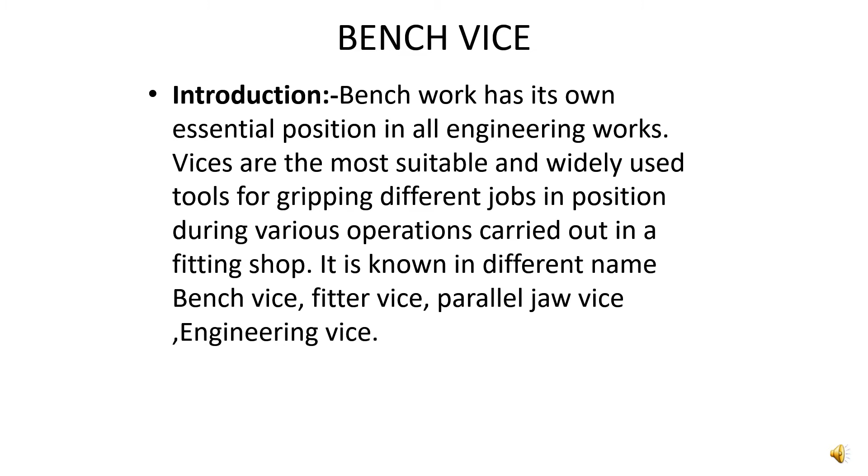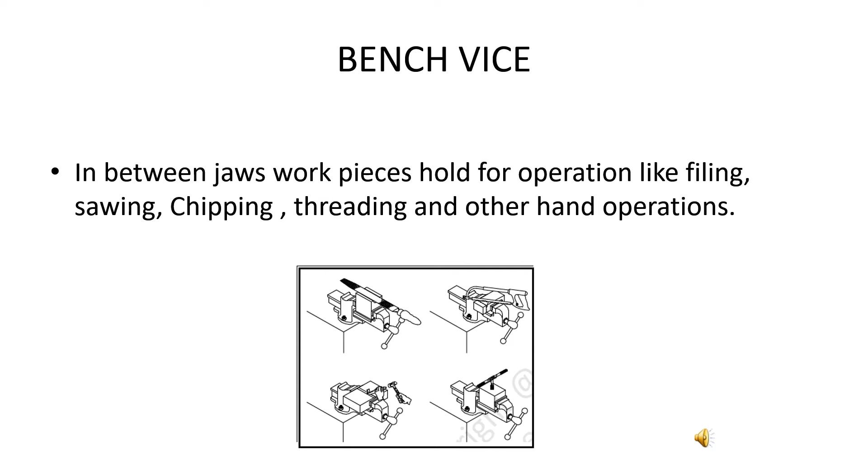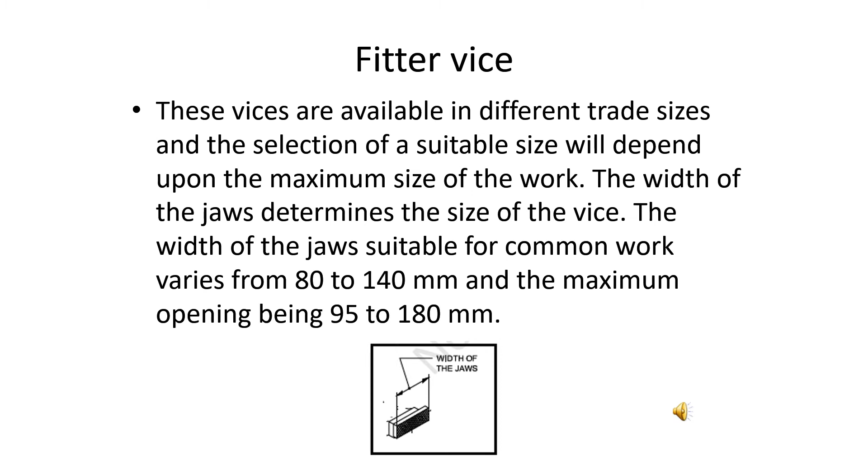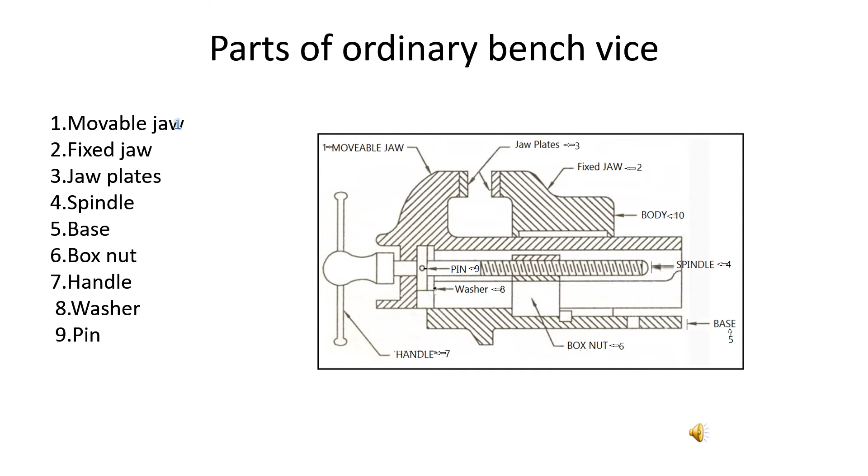Parts of ordinary bench vice: first one is movable jaw, second one is fixed jaw, third one is jaw plate, fourth one is spindle with square thread, fifth one is base, sixth one is box nut, seventh one is handle, eighth one is washer, ninth one is pin, tenth one is body, eleventh one is coil spring.

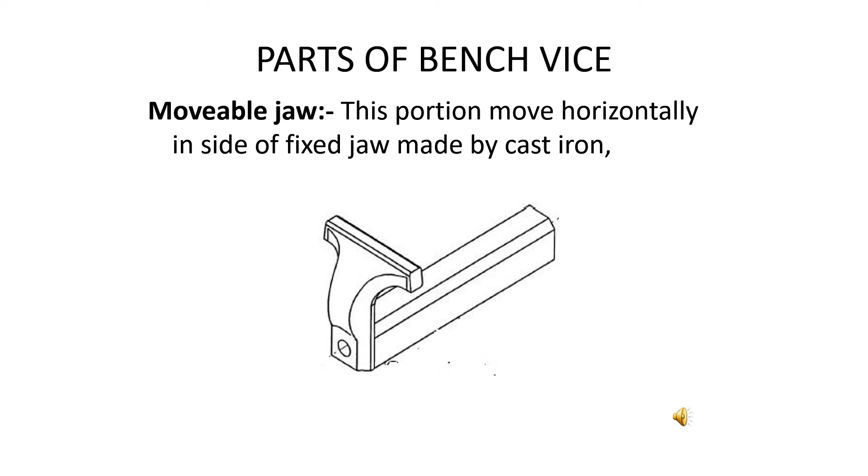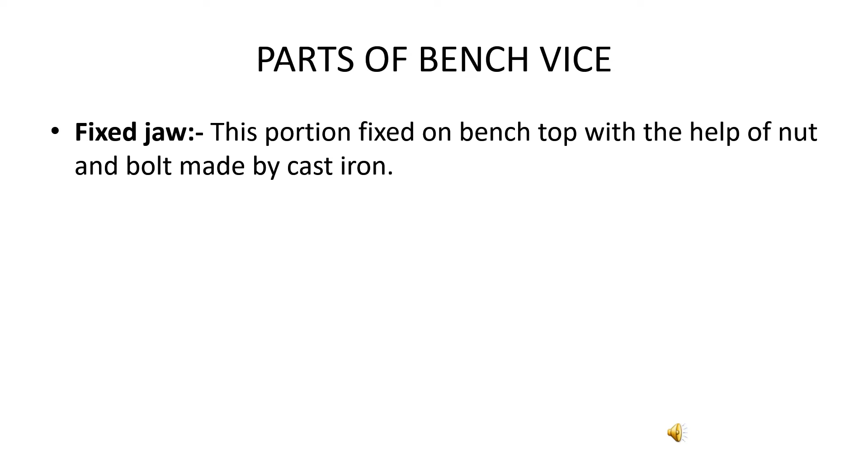Now we will know about individual parts of bench vice. First one is movable jaw. This portion horizontally slides inside of the fixed jaw. It is made of cast iron. Second one is known as fixed jaw. This portion is fixed on the bench top with nut and bolt. It is also made of cast iron.

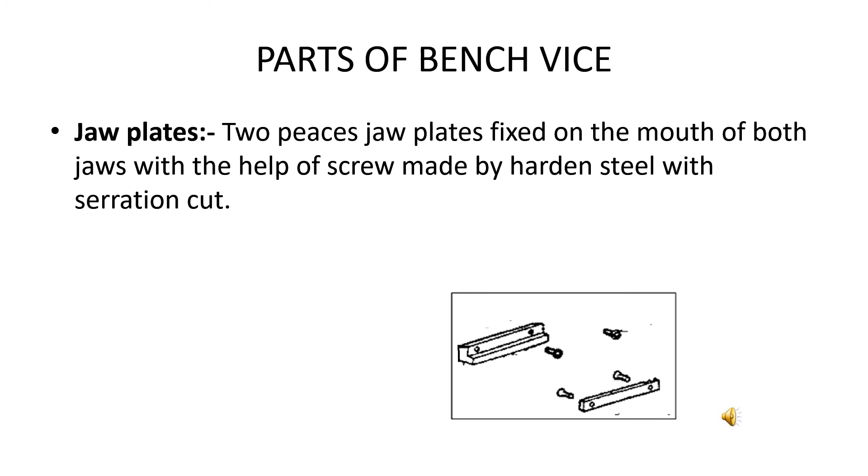Third one is jaw plates. It is available in two pieces. Individually, they are fixed on the mouth of mobile jaw and fixed jaw with the help of screw. It is made of cast steel, hardened and tempered. On the face of those pieces, serration is cut. Serration is the design on a flat surface to prevent slip.

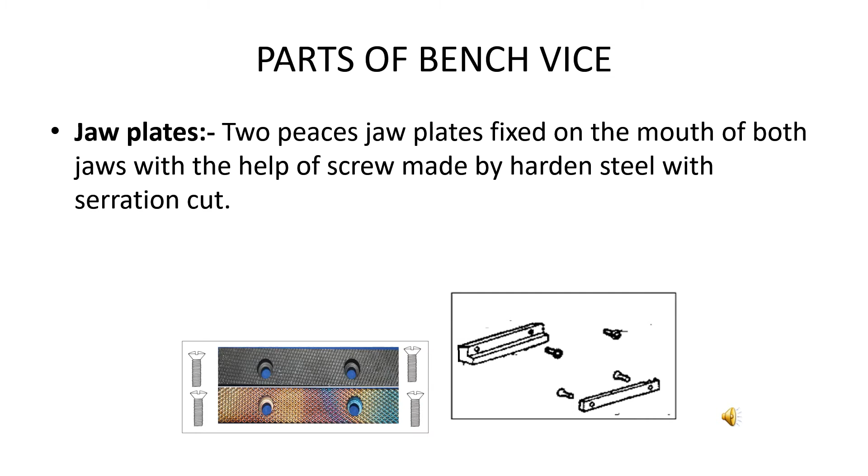Next one is spindle. Generally spindle is fixed with mobile jaw with the help of spring, washer and pin. It is made of mild steel. On the surface of spindle, square thread form or buttress thread form is made for quick release vice. Spindle is connected with box nut to move horizontally inside the fixed jaw.

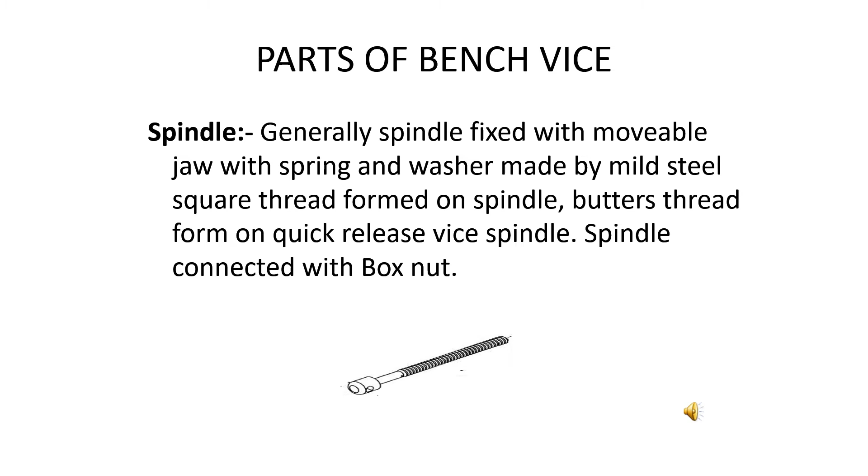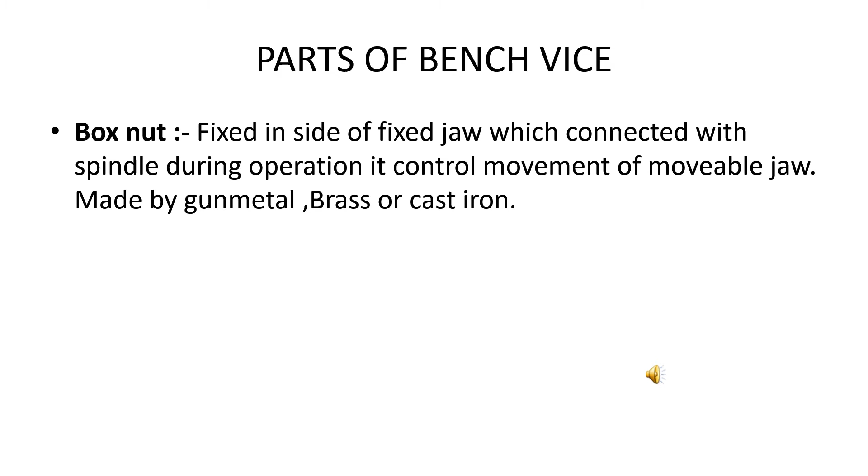Next one is box nut. That box nut is placed inside of the fixed jaw. It is connected with spindle to slide the movable jaw inside of the fixed jaw. It is made of gunmetal, brass or cast iron.

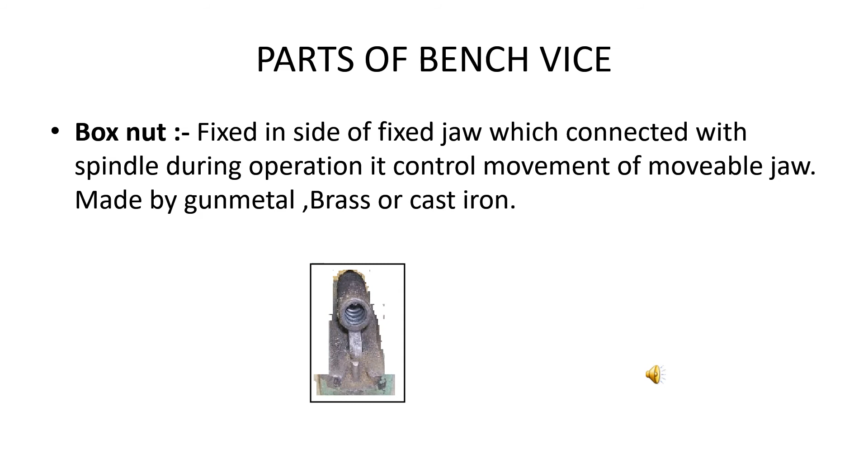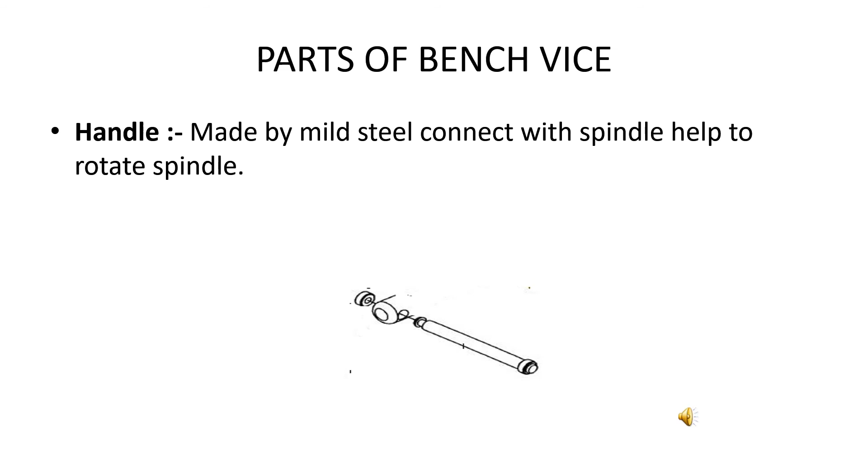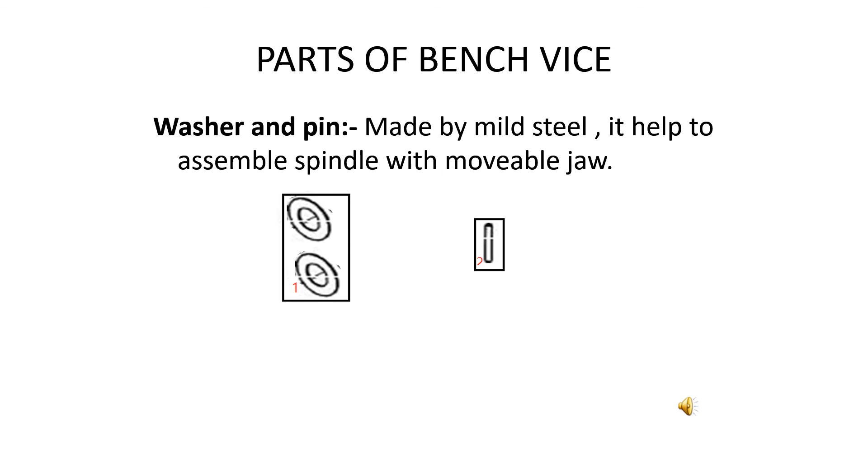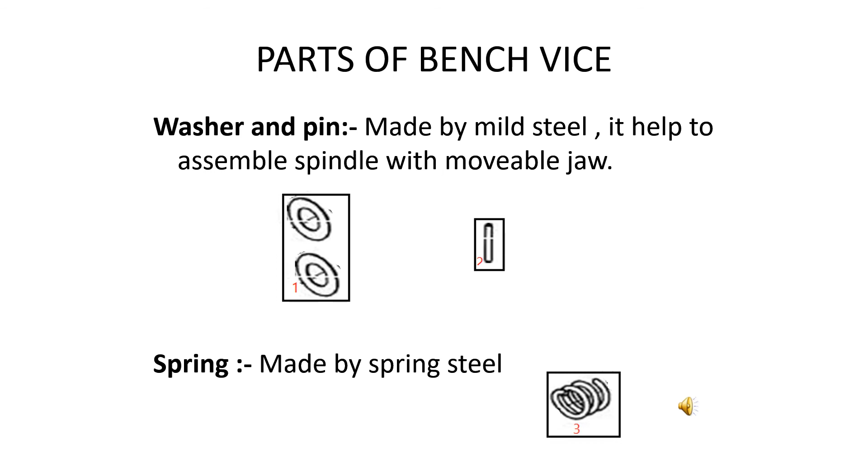Next, handle. It is made of mild steel. It connects with spindle, helps to rotate spindle. Next, a group of parts which help assemble spindle and movable jaw: first one is washer, second one is pin, both made of mild steel. In between washer and pin, one part is fixed known as spring, made of spring steel.

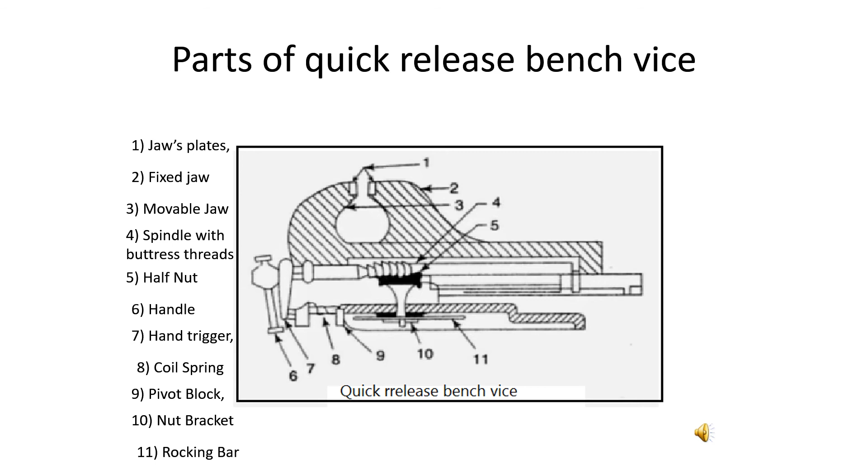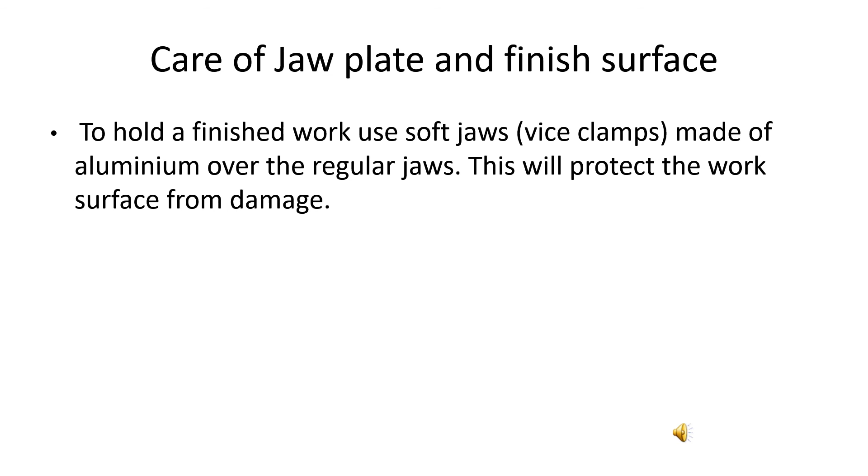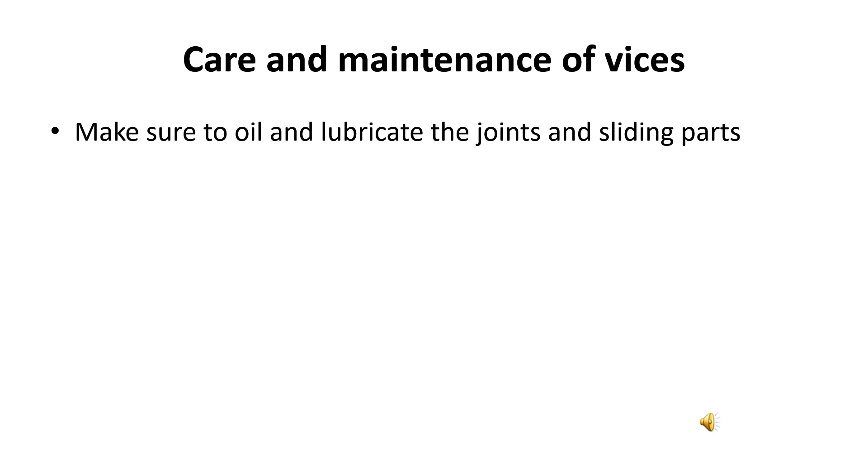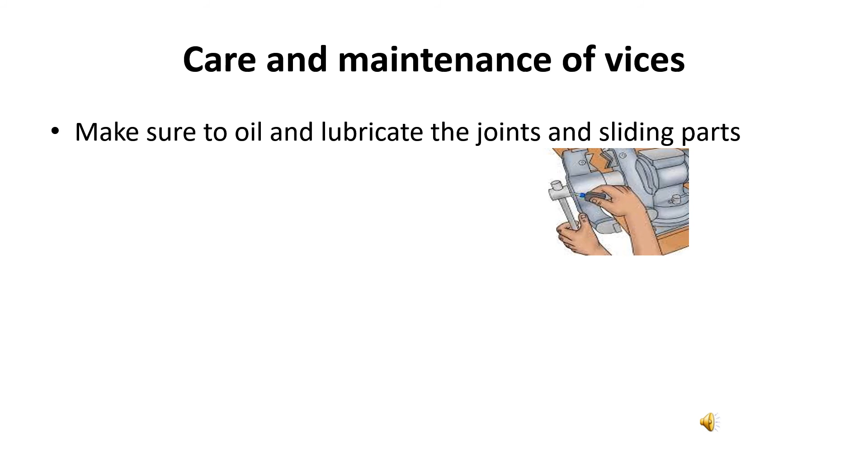If you take care and maintain tools and equipment, the life of the tools and equipment will increase. Also, at the time of work, it will not fail you. In the same manner, if we take care and maintain the vice, it will give us proper work. So make sure to oil and lubricate the joint and sliding parts. To oil the sliding section, first open the jaw completely, clean the surfaces and apply a layer of grease to the surface.

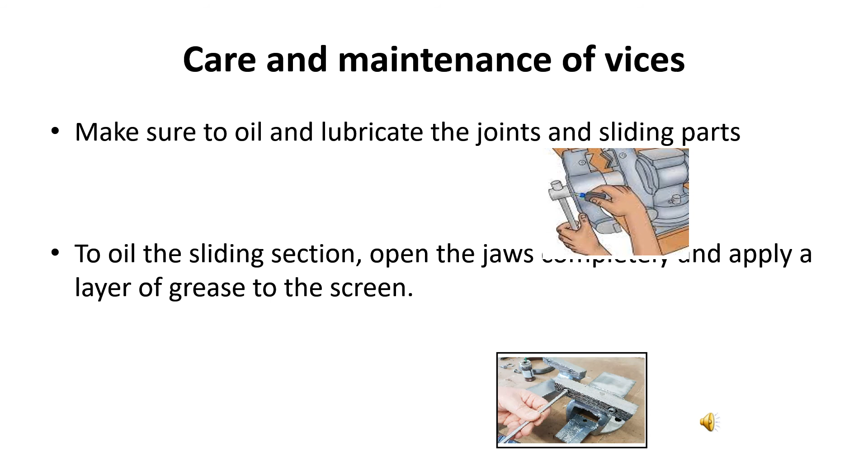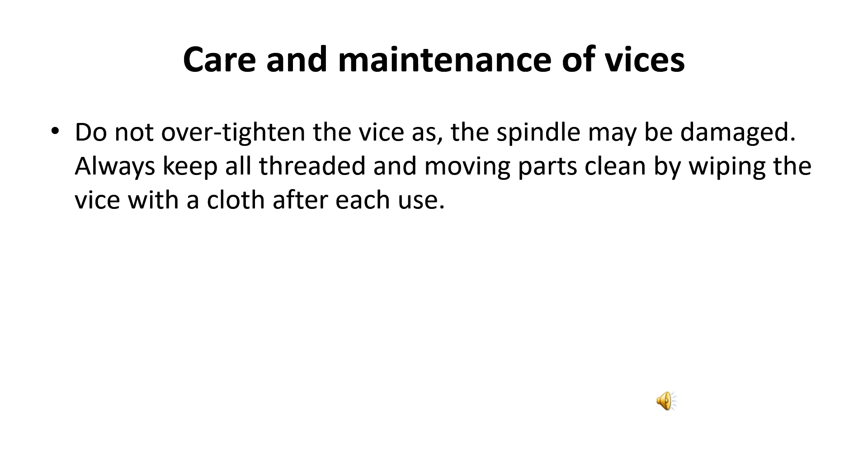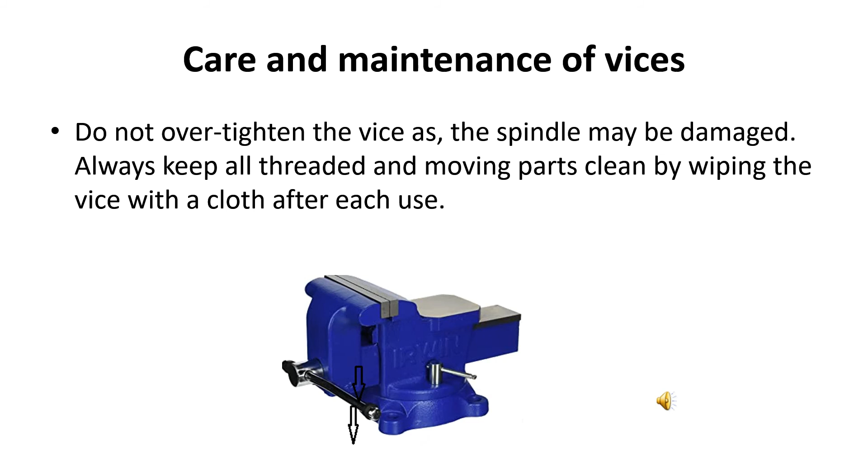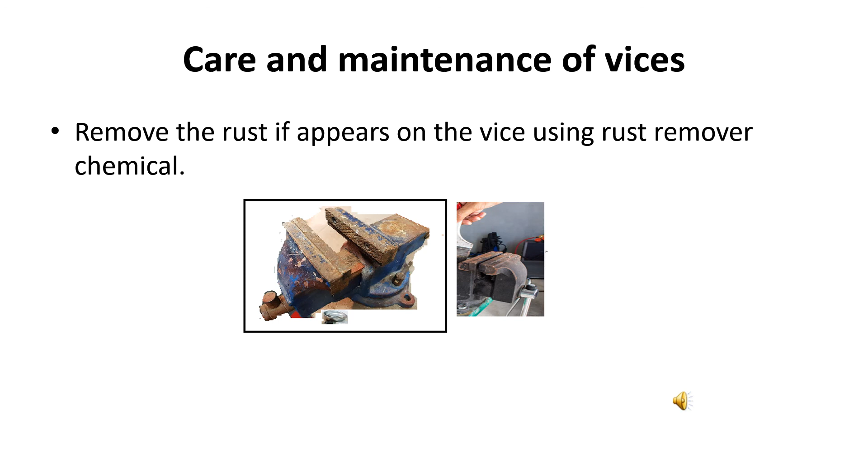Do not over tighten the vice as the spindle may be damaged. Always keep all thread and moving parts clean by wiping the vice with a clean cloth after each use. When the vice gets rusted, at that time first clean it, then disassemble the complete vice and remove the rust using rust remove cleaner and clean it by brush and cloth.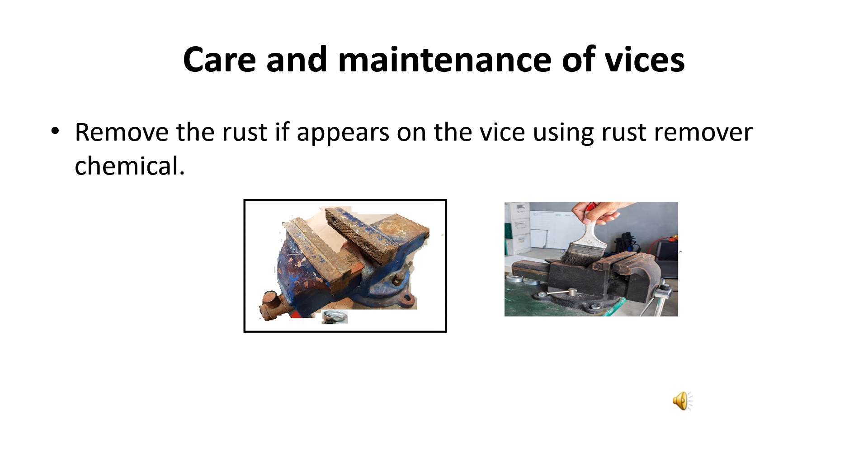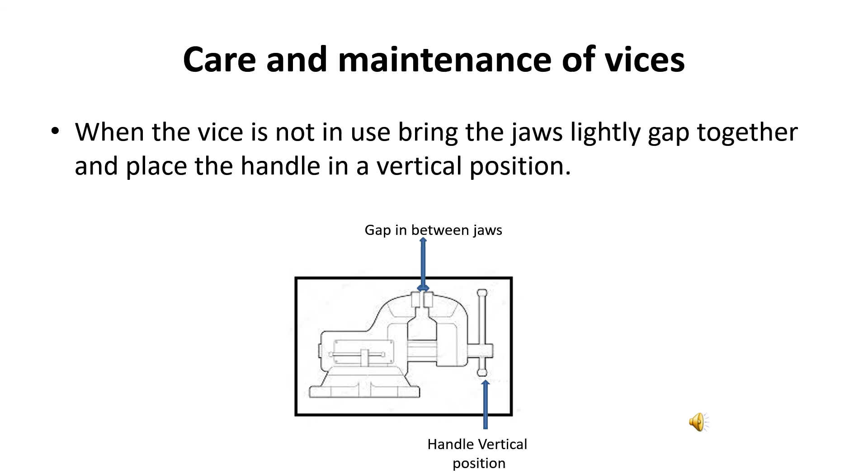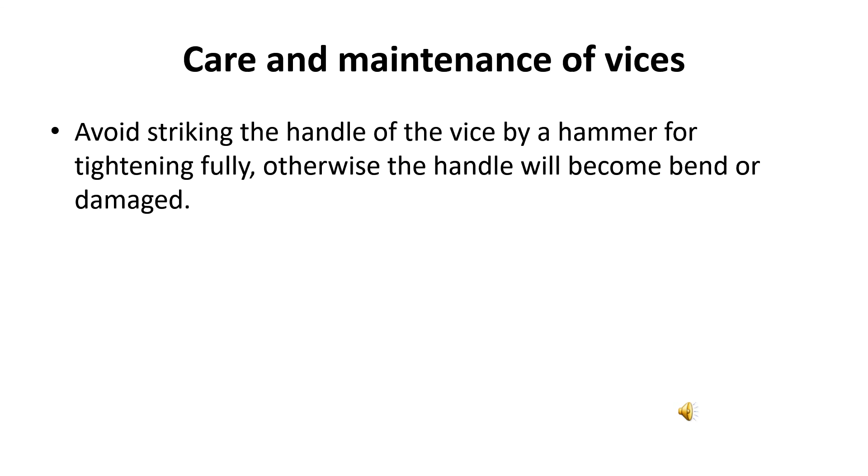Handle rotating pressure is sufficient to firmly grip the workpiece between two jaws. But a few people, not satisfied, strike the handle with a hammer to tighten the workpiece. Don't do like that. Don't strike on handle with hammer. Either spindle and handle, both will get damaged.

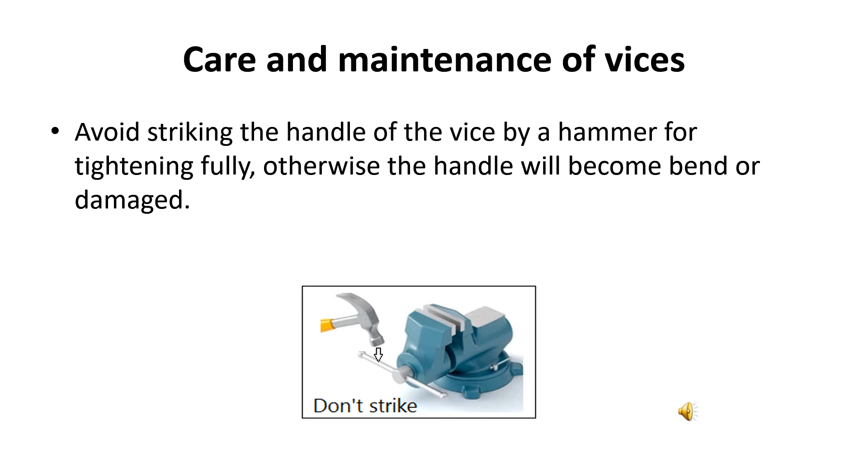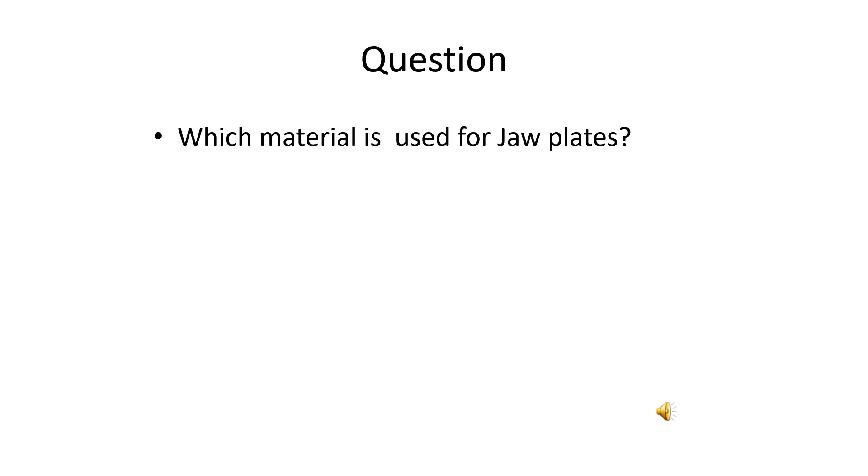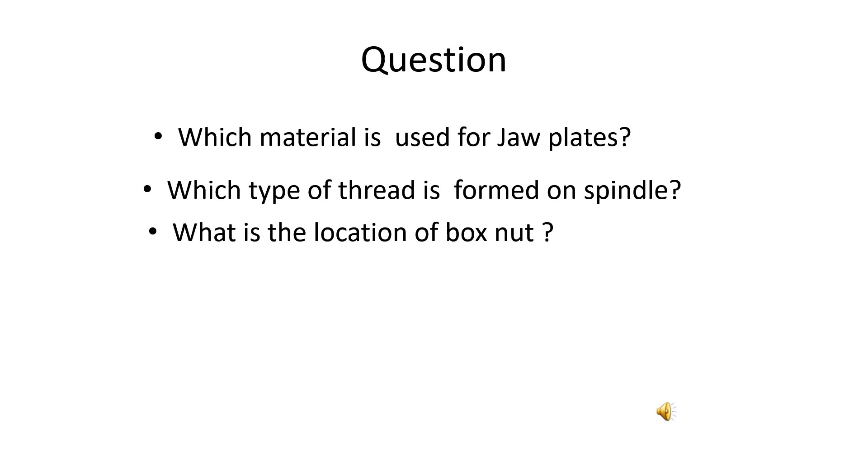Bench vice chapter is over. Now check yourself by answering this question. First, which material is used for jaw plates? Second, which type of thread is formed on spindle? Third, what is the location of box nut? Fourth, which material is used for box nut?

Thank you, students. In next class, I will discuss other types of holding devices used in mechanical workshop.